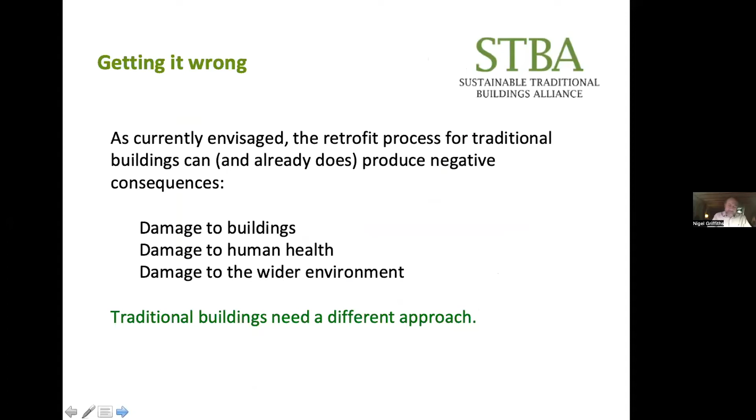Before getting into what we can do to improve our building stock and ways of managing risk, it's very important that we don't compromise that.

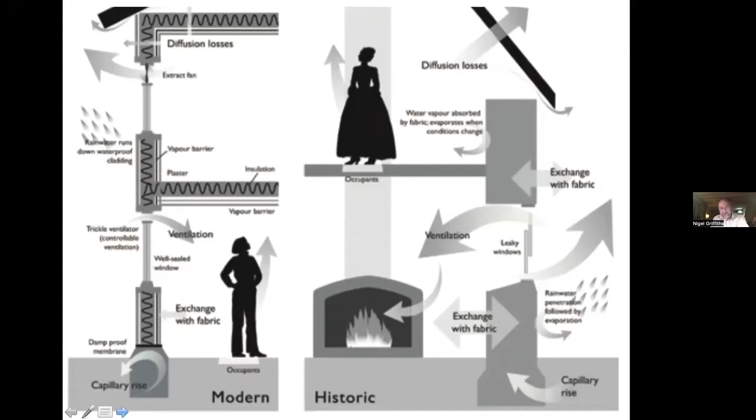And I'll come back to ventilation. If you get this wrong, if you seal up a building and stop it breathing, you get what we call composting building syndrome—and here's a fine example of it, within a couple of years of poorly applied solid wall insulation. Basically, moisture plus heat plus organic material equals compost. That's what we're up against, folks.

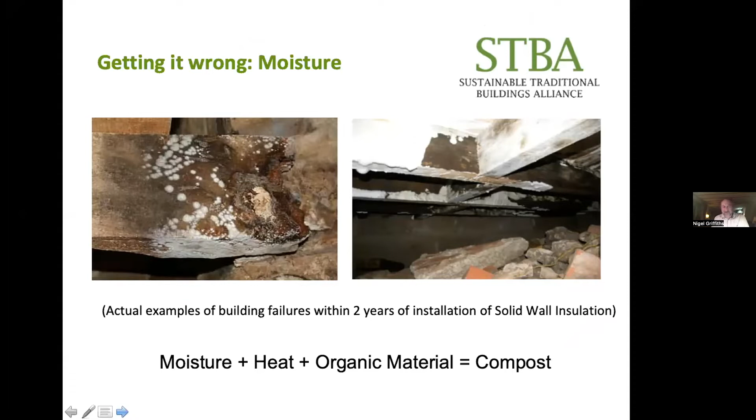Not only that, we've got our friend the dust mite, and if you push moisture levels beyond a certain level, their rate of reproduction increases exponentially. So that and mold growth—we've got a lot to contend with.

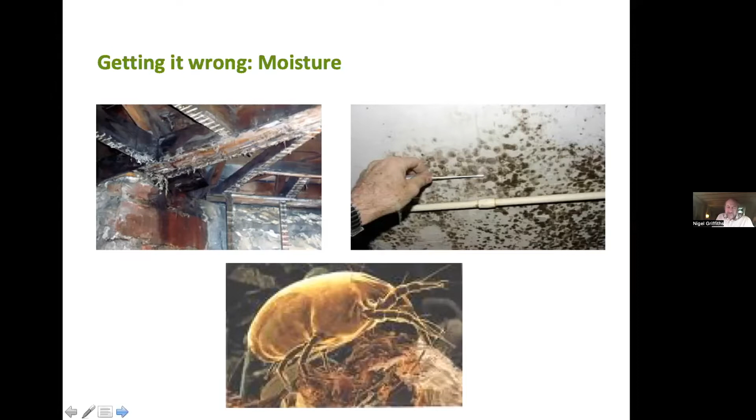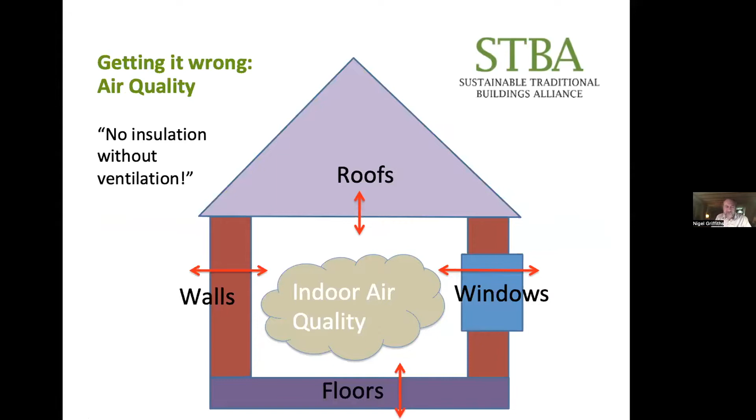There's a very good mnemonic: no insulation without ventilation, based on the American Constitution's no taxation without representation. It's terribly important when we start insulating buildings that we check the ventilation, otherwise we get poor indoor air quality. By sealing up floors, roofs, windows, we compromise this natural ventilation, which is so critical to old buildings.

And there are restrictions in terms of moisture movement. If you make a wall too cold by stopping the heat running into it, i.e. by using internal wall insulation, you reduce the ability of that wall to dry out. In other words, it needs a certain amount of heat running through it from the inside to the out in order to stay dry, because water will penetrate that skin.

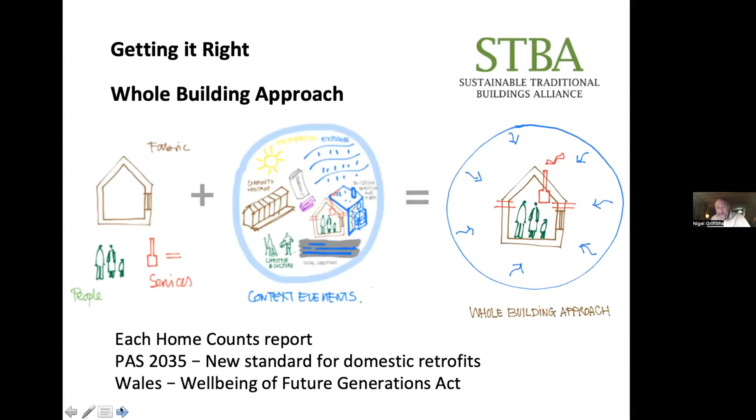In Wales, they're ahead of the game. They've got what they call the Wellbeing of Future Generations Act, which obliges the government to take a much more rounded approach to all new policy. Therefore, they can't just get away with a single measure like carbon dioxide emissions from a building in use - they've got to take a more rounded approach. We need health, heritage, embodied energy in there as well. All these things are important, otherwise you'll end up creating more carbon emissions than you save.

STBA published a paper quite a few years ago, well before the Each Home Counts report, called 'What is Whole House Retrofit?' You can look at it in different ways. There's a very basic approach, just looking at U values of individual building elements - improving the U value of a wall or roof. But that doesn't address questions about air tightness or thermal bridging between a wall and a floor. If you insulate the wall but not the floor, you can get a cold spot, or vice versa, and thanks to thermal bridging you may start to get condensation, damp and mold appearing where you didn't have it before.

The next one up is Whole House Plus, where you integrate all the services, ventilation, and behaviour - but that only gets us so far. Really, where I want to get people to, and I'll come back to it at the end of this presentation, is what we call Whole House Advanced, where we add in the community context as well. So, free download that paper from the STBA website.

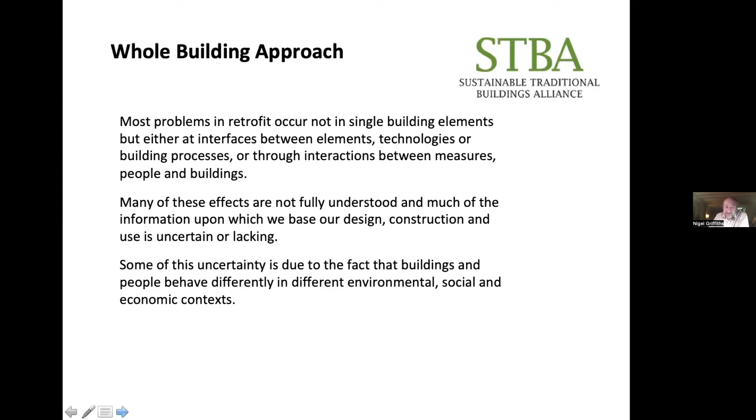So where are we actually going in terms of risk? Most problems in retrofit occur not in individual building elements - wall, floor, roof - but at the interfaces between these elements or between elements and different technologies. A lot of these effects are not fully understood. We don't really understand how a lot of buildings behave, let alone how they behave when we start making changes to them. And it's going to be different depending on how you occupy the building, and even economic context can change it as well.

A very good example of this: when you make one part of the building warmer, you make another part relatively cooler. If you insulate the back wall of a property but leave the front, perhaps for heritage reasons, and don't do anything with the moisture movement through that house, you've actually made it more likely for condensation to occur on the inside of the front elevation. So you've done something to the back, but you've got suddenly a problem at the front that you didn't have before. These are the kinds of issues that we're up against.

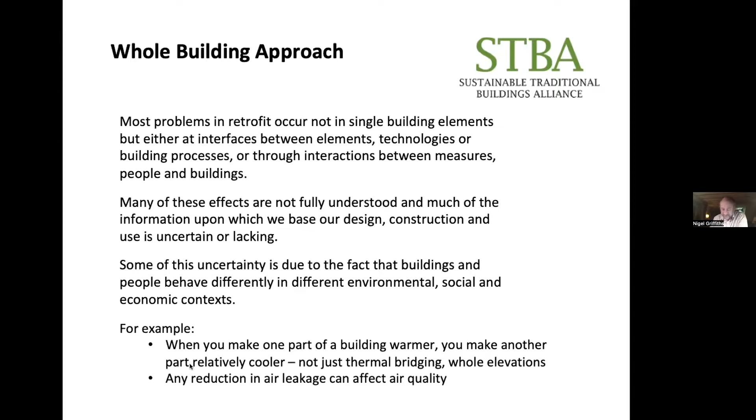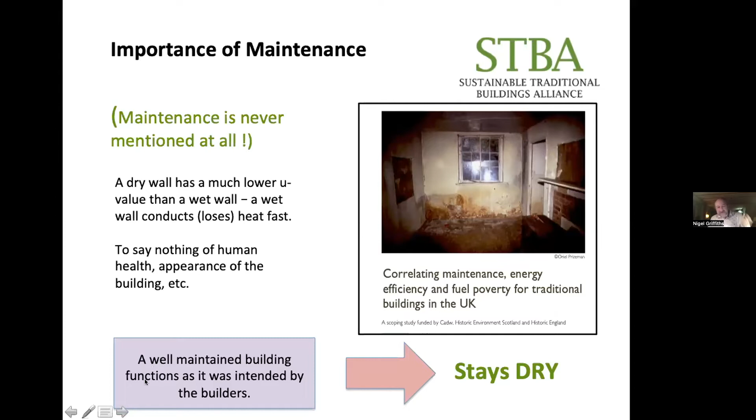Maintenance is never mentioned at all in the whole retrofit debate, but as we all know, a dry wall is much more efficient thermally than a wet wall. A wet wall just conducts heat fast - water is very good at transferring energy out of the building, to say nothing of health, etc. We must maintain buildings in the way they were originally designed to function. That I think is a critical message, but it's kind of not sexy - it doesn't mean spending loads of money and putting in lots of new whizzy technology. No, just fix the building.

So, what can we start to do? By the way, this is what I guess you'd call a building with air tightness challenges currently - one in Yorkshire, I believe. We can look at these different aspects of fabric, and then we can look at these different aspects of services, including ventilation, of course, and we also need to look at the interaction with the occupants.

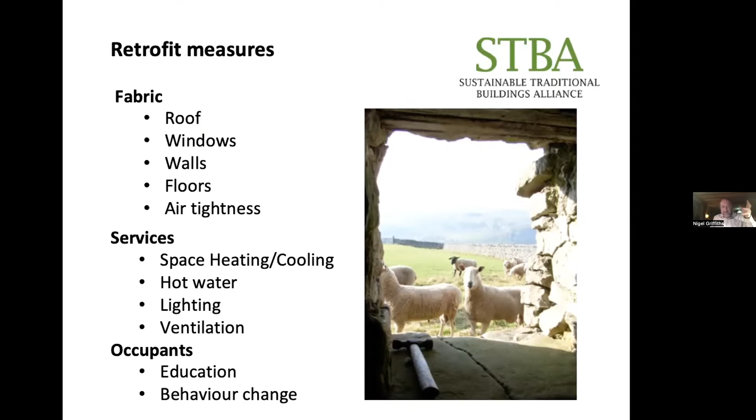There isn't enough time tonight to go through measures for every single one of these, so I'm just going to give you one or two examples.

Looking at a roof, we know that we can insulate lofts reasonably effectively, but it is absolutely critical to maintain ventilation at the eaves. We have found in a number of properties, if you don't maintain that ventilation, you start to get condensation forming on the undersides of rafters, and then you get composting building syndrome. So it's absolutely critical when insulating a loft to use some form of eaves ventilator.

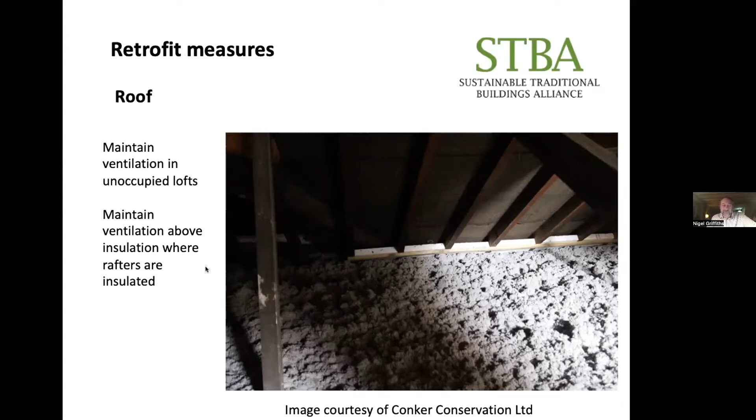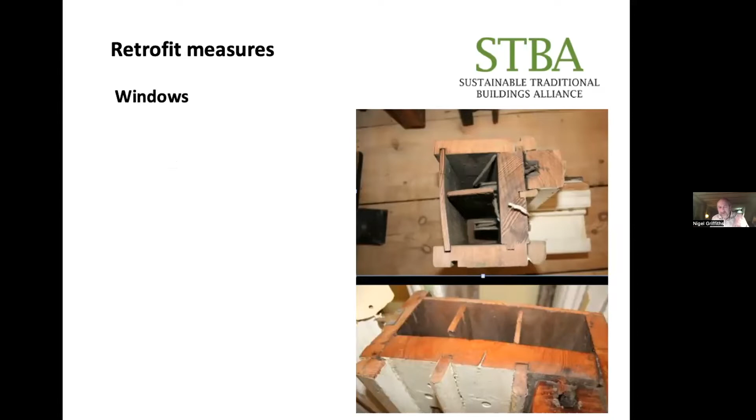Windows. That is a lovely section through a sash window. This is slow-grown Baltic pine, absolutely beautiful stuff. It smells, when you cut it, the way it would have done when the tree was first cut. Those windows originally had rolled glass rather than float glass, which has wonderful imperfections that give a building character. They had the correct proportions, were easily repairable, and a lot of craftsmanship went into them.

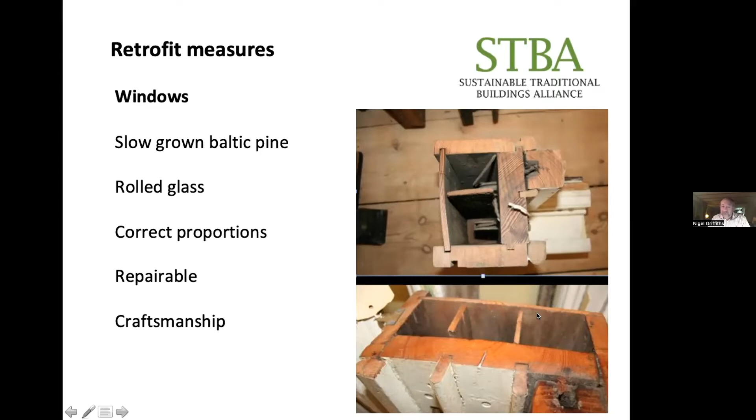There is, I think, a great loss that as a society we've experienced thanks to indiscriminate replacement of really very good functioning sash windows. There were plenty of things we could have done to improve those windows instead. We've put together at the STBA a number of decision trees for different types of fabric intervention, so this is just one example.

This is for windows. Do you already have double glazing? If you do, is it good double glazing? Has it got a decent air gap? Or is it really very early double glazing, which actually still conducts heat quite quickly? You can go through this decision tree.

I'm not going to go through it in detail right now, but you can come to some solutions, which might just be to repair, or to repair and add secondary glazing. They might be to do those two things and add draft proofing, or reinstate your shutters if you've got them, or just heavy curtains if you haven't, because heavy curtains and good draft proofing, plus secondary glazing, will do most of the work of window replacement in thermal terms.

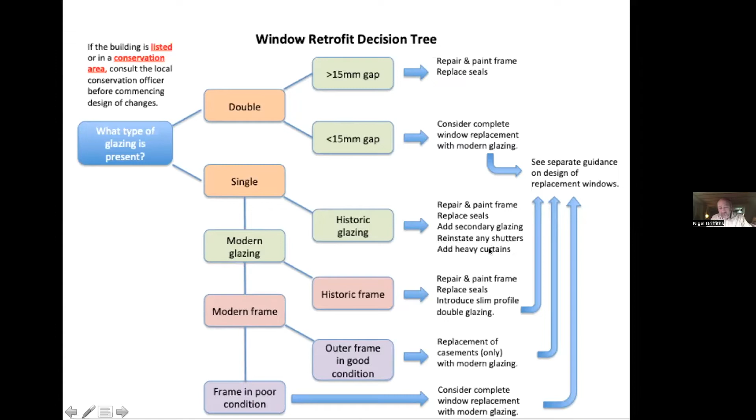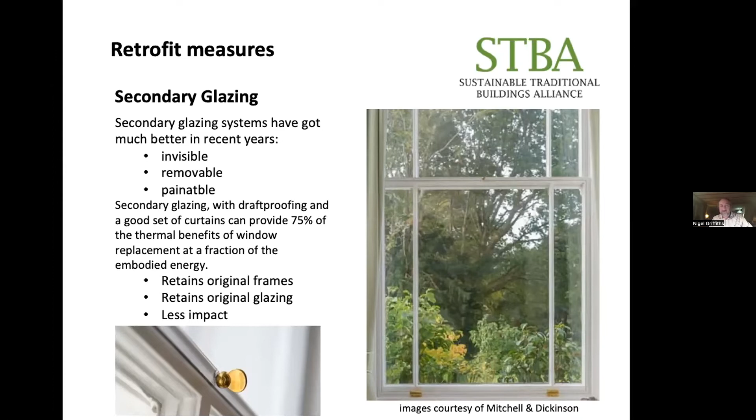So that's certainly something you might have written off as an approach 10 years ago, but we're getting very good at this now. The same with ground floors.

Is it solid? Is it suspended? If it's suspended, you can, I don't know, insert a small child from underneath and ask them to do the work for you. If you haven't got a willing child, you may have to take up the floor and insulate it from above. If you're lucky enough to have a cellar below with good access, absolutely fantastic. But a crawl space is normally all you're going to get.

So there are a lot of challenges with floor insulation, and with solid ones, I'm afraid a lot of the time the solution is just to leave it where it is. Given the embodied energy of ripping up a floor, the solution may very well be to put down a carpet with a good underlay, or solid flooring with a decent thermal underlay. That, in overall embodied energy terms, is probably your best bet with solid floors. Digging them out is a major issue.

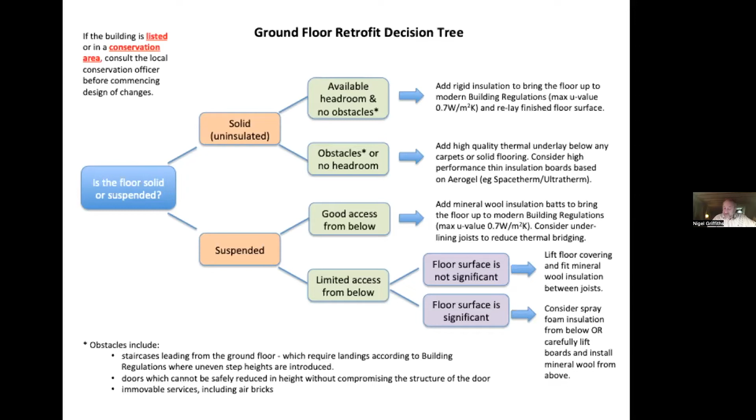What about walls? This is a terrace in my hometown in Harborne, in Birmingham. They insulate the external walls of that terrace over my dead body. I love it. It's got a rhythm, it's got a real beauty to it in many ways. So there are many things you can do, and it depends very much on what you've got.

That top picture, well, those walls have already been rendered. By taking off that render and putting on an insulated render, you're not substantially going to change the appearance of those buildings. The insulation might be a little bit thicker, but worst case scenario, you might have to extend the eaves a little. It is doable here, you've got a tiny gap above the windows. Sometimes you haven't. So on the top picture, I'd say, yeah, okay, maybe go ahead and do that.

The bottom right, obviously not. The one on the left of your picture, well, that's more difficult - that's a Scottish tenement, as I recall. There are certainly some government-funded, or government-backed, projects around at the moment to insulate such buildings externally.

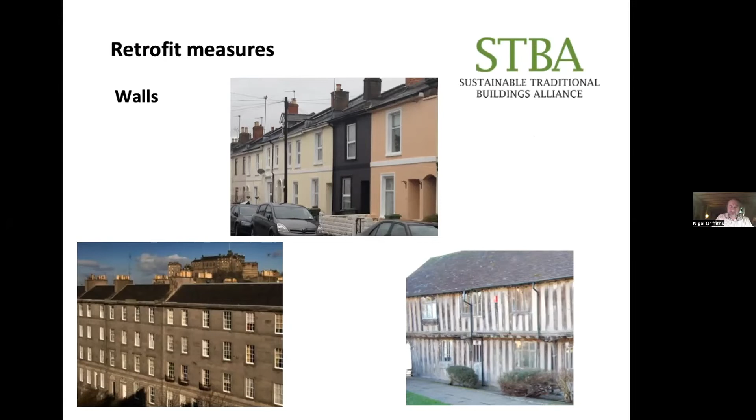But it doesn't have quite the delicacy of some other buildings. It's a nuanced thing, it's difficult. Take a building that's already been rendered, the render's been removed, there's a lot of damage to those bricks, you can't really see far off.

But they're using a breathable system here - a wood fibre board which has been attached to that building on the outside. It'll then be rendered afterwards. The great thing about wood fibre is that it's vapour open, and the render applied afterwards will be a lime render. It's a lime built building, so that will also remain vapour open, i.e. any build-up of water inside the property or inside the wall matrix is allowed to escape both inside and out. Walls breathe, I should say, in both directions.

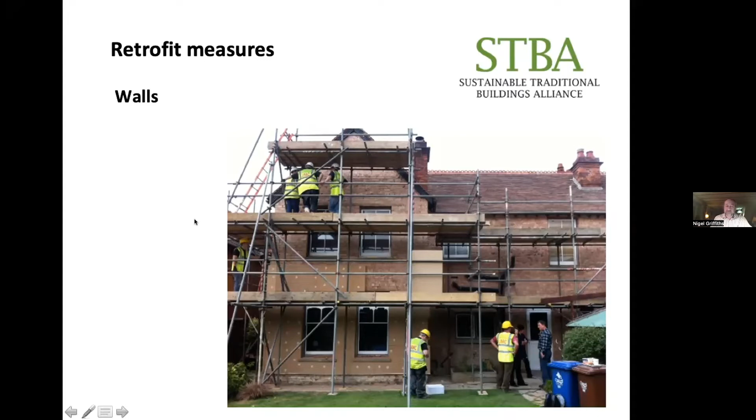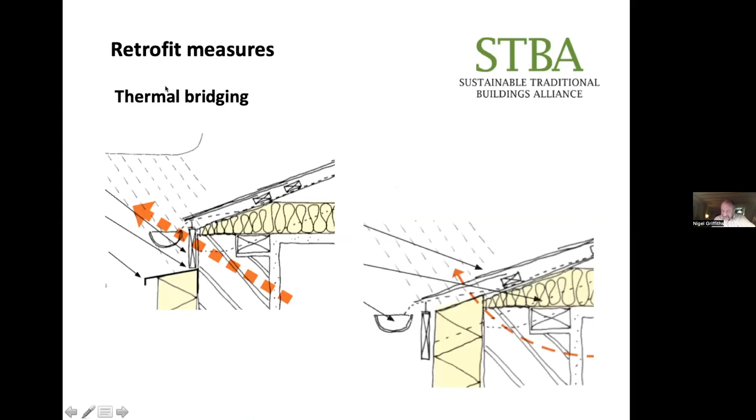A word about thermal bridging, which I think is an important consideration. It most commonly occurs at the junction between a flat ceiling and a wall if it's been insulated externally. It's a difficult detail to get right, and this is why it's so essential to extend the eaves - you can actually produce a junction between these two types of insulation. If you don't do that, you tend to get condensation forming at that top part of the wall, and people often ask why. Nothing else seems to have changed internally, but of course you've got a cold spot there, and the moisture that used to perhaps condense elsewhere has got nowhere to go. So thermal bridging, that's what it is.

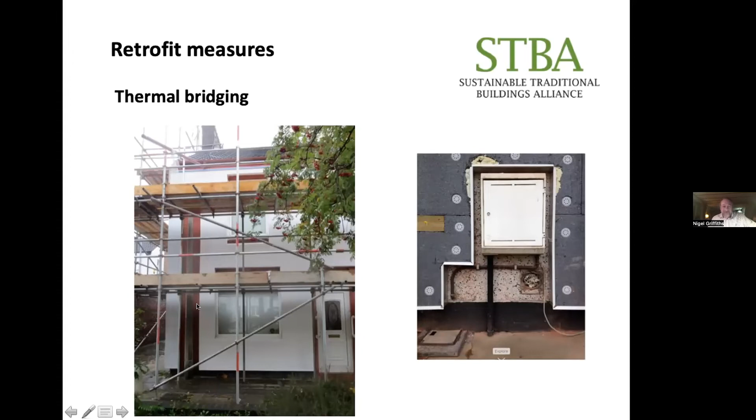Some more horror show, how not to do it. This is in Wales, as I recall, on some social housing. Really, they need to do something else with the gas box, not try to work around there, because they've just created a huge thermal bridge. And in the other picture, you've got a lamppost, and they had to insulate around the lamppost. You get these kind of crackers things in retrofit all the time - it's really about bad planning and a lack of architectural design, and we do need the architects involved.

Internal wall insulation, yes, you can do it. There's going to be a loss to floor space. You've got to use moisture open materials, and a great deal of care is needed at the reveals, i.e. junctions between walls and windows and doors. You may need to use a super thin insulation, something like an aerogel product, to get around the problem of the reveal - otherwise you get condensation at the reveal. It's the one time to use a really, really high performance, super expensive insulation.

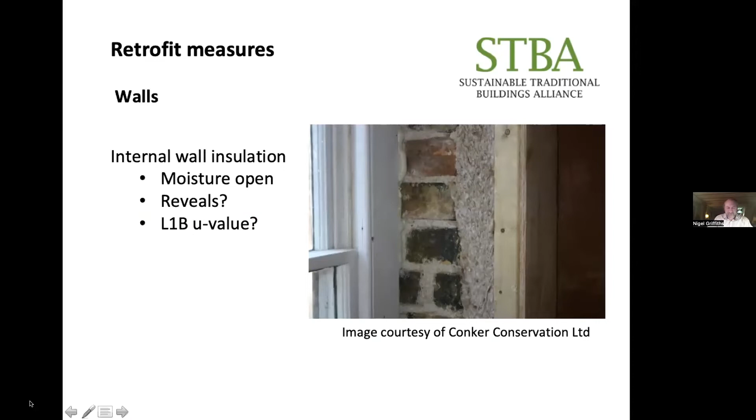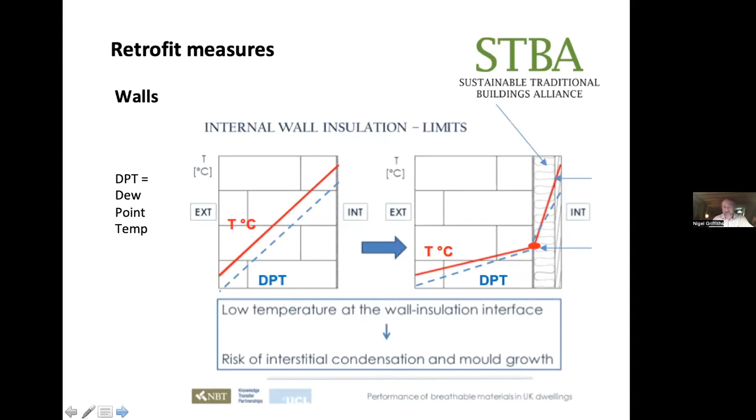There are also limits to how far you can go with internal wall insulation because of what we call the dew point temperature - sorry to get techie on you. But if you get this wrong, if you put too much insulation on the inside of a wall, you can cause condensation to happen within the wall matrix, usually at the junction between the insulation and the wall. The place where you didn't get a problem before suddenly gets wet, and invisibly, because it's behind the insulation, you get mold growth, and that ultimately can harm human health. So come back to what I said at the start about retrofit needing to have that human component.

Just for once, and this is quite unusual to hear a builder say this, the building regulations are our friend at the moment. L1B, the domestic existing part of the thermal regulations, has what's commonly called an exemption, but it's really a special considerations clause - 3.8 to 3.10. It's a free download from government websites. It mentions various categories of building where these special considerations apply, including buildings of traditional construction. So that's all the old buildings you have in national parks, be they stone, be they brick, in fact be they timber frame, but I think largely stone.

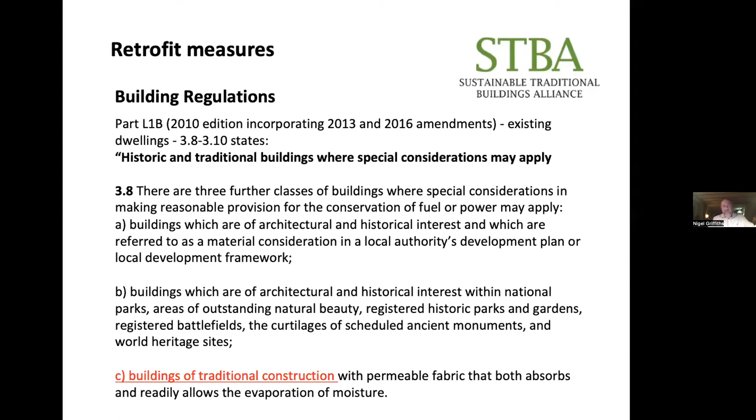So they're built with lime mortar, a permeable fabric that readily allows the evaporation of moisture. In those buildings, they have this exemption that when undertaking work, the aim should be to improve energy efficiency as far as is reasonably practical. This is very important because it gives you some ammunition if dealing with the building inspector - you can say, no, actually, we don't need to meet the minimum U values set out in the other parts of Part L of the building regulations, because it's a building of traditional construction, permeable fabric, vapor open. We just need to do what is practicable, what is safe.

However, there is a proposal afoot, and there was a consultation last year to change Part L, so the only exemption will be in terms of moisture risk - we lose the exemption for traditional buildings in terms of their character, the character of the host building. That is a very important change and proposed change, and we need to get onto it and make sure it doesn't get too much traction. Whether it was deliberate or not, I don't know, but it's a bit of a charter for the insulation companies to get out of that very important exemption for traditional buildings that's been there for a long time, since 2010.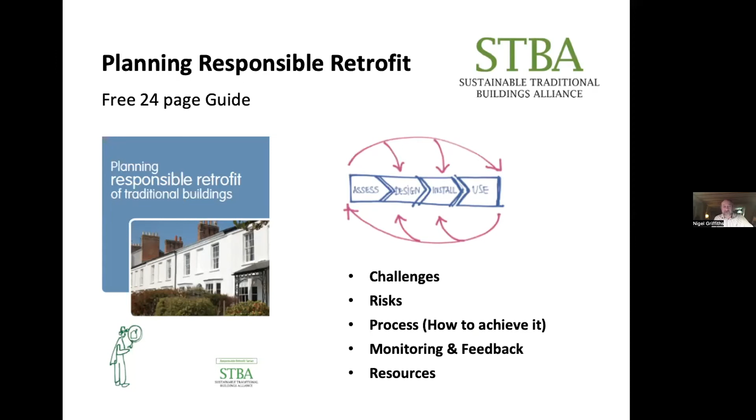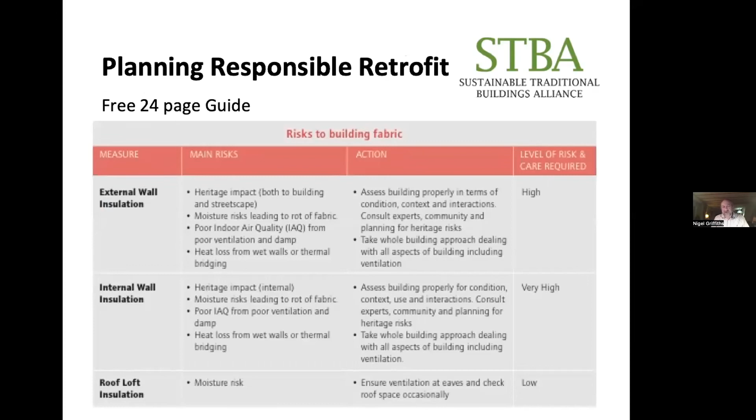The STBA does try to collect and share that information. So, for example, in that guide, it tells you what the risks of EWI, IWI, roof and loft insulation are, and tells you how to manage those risks. That's the kind of information you'll find in that guide.

I mentioned there had been a new standard for retrofit, which came out in 2019, and this really marks a sea change in how we approach retrofit in this country. Because among its aims, it starts with functionality, usability, and durability. It mentions comfort, health, and well-being - this is really revolutionary stuff for a standard that's got to do with energy efficiency. And amazingly, it also talks about the enhancement of architectural and cultural heritage as represented by the building stock.

So to get these things actually thought about when planning retrofit is a major success. Now, all publicly funded projects have to use this new standard, but it's of course voluntary for other schemes to use. I would really suggest that whatever strategies you develop for the national parks are based on the principles, the aims, of PAS 2035. It really is a useful document.

It's very heavy on process. The idea is to avoid the one-size-fits-all approach. It absolutely relies on survey - every building is different, and means we've got to treat every building with respect and develop an individual plan for each one. We can't just say that what works in one place will work in another. Even location can change how you decide to approach a retrofit plan.

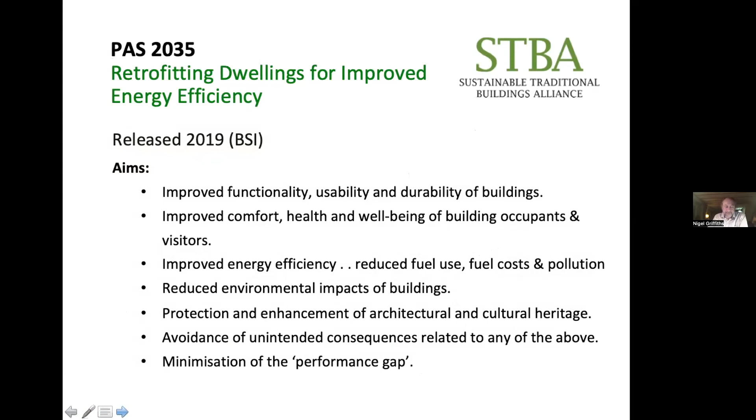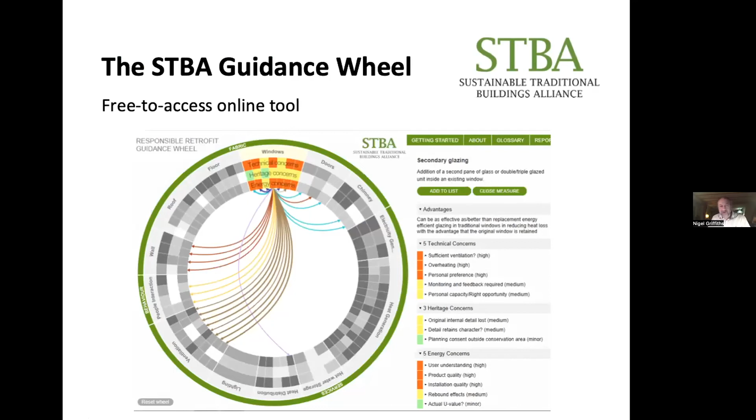The guidance wheel itself is a freely available online tool. If you simply Google STBA guidance wheel, it will take you to a website called Responsible Retrofit, where you should be able to access it. If we had a little more time, I would actually demonstrate it for you online, so I'm going to whiz through the slides which are here, but it's an aid to decision making.

What it does, having selected the context and a particular measure - in this case we've selected secondary glazing - is provide arrows that link to other aspects of building fabric and services you need to think about. Each of those arrows has an explanation attaching to it. There are technical concerns, and all the things you see on the right-hand side of the screen open up with those arrows, dropping down into menus which give you a great deal of information about what those particular concerns are, whether they're heritage, energy, or technical concerns.

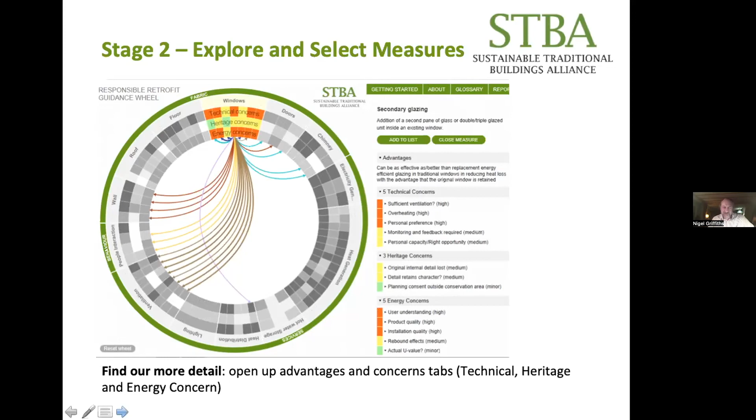And all of this is backed by published peer-reviewed research, which is itself accessible through this tool.

So, if you've selected external wall insulation, it'll tell you that the technical concerns relate to ventilation, moisture risk, thermal bridging, which we've touched on, and indeed overheating - that can be a problem with some retrofitted buildings. And of course, in terms of heritage, we have a change of appearance, a loss of detail, and ultimately a risk of damage to the fabric. So those are the sorts of things that are flagged up by the guidance wheel.

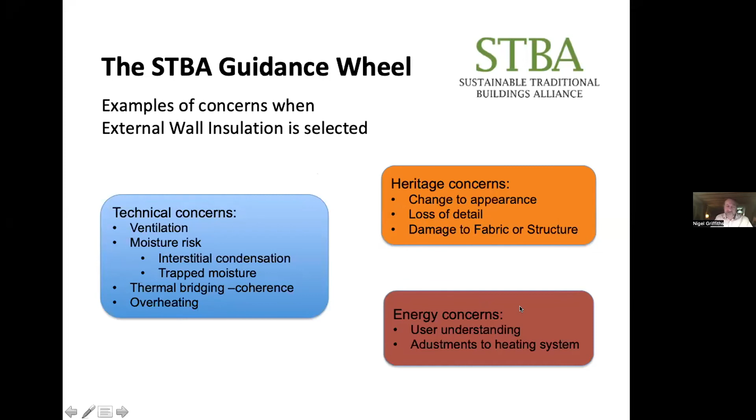I'm whizzing through this because I want to tell you about some guidance from other people. Historic England have put out some great guidance on old buildings, including specific guides to dealing with particular building elements, be it a roof or a floor and so forth. But their overall guides addressing process and the principles of retrofitting old buildings are also very good.

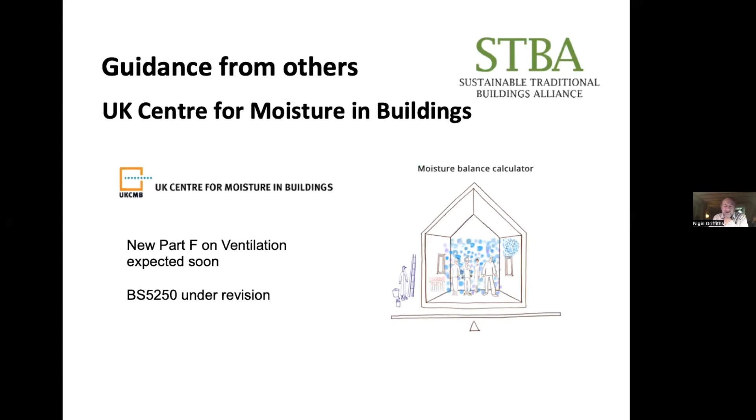I commend Historic England to you for sources of further information. There's also the UK Centre for Moisture in Buildings, which was founded by a late colleague of ours, Neil May, from the STBA. Adrian worked very closely with Neil, and we've kind of handed over the expertise in moisture in buildings to them. So they are now the kind of UK heads of this.

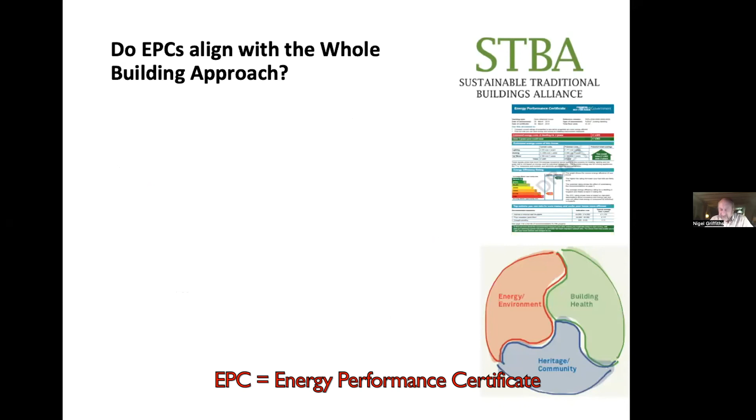I'm sure you've all heard of EPCs. A lot of you have probably got them. I'm afraid I take rather a dim view of EPCs. They simply can't align with the whole house approach. I mean, they can provide a useful part of it, but they can't deliver it. There's nothing on condition, context of any kind really - moisture, ventilation, heritage significance is completely excluded from an EPC. And I call it yesterday's metric for yesterday's agenda, and I stand by that.

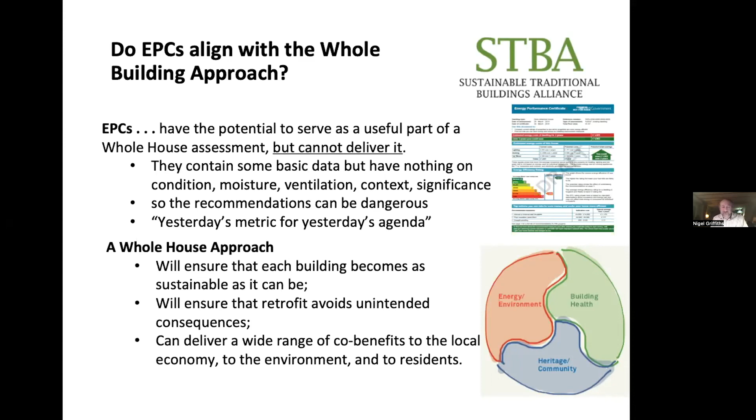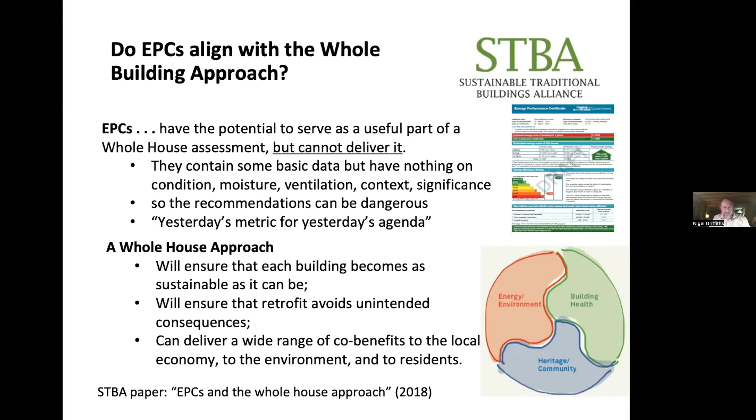So we did quite a detailed paper exploring what could be done about EPCs. That's another download if you want it.

I said right early on, when we were looking at the different levels of whole house retrofit, that there was this whole house advanced level. Now that kind of morphs into what I am now describing as a regeneration agenda. If we're going to spend an awful lot of money and effort changing our building stock to accommodate the needs of the 21st century and address environmental issues, including climate change, but also resource depletion and pollution of different kinds, and keep in mind heritage and health...

We can go further. We can provide local employment. We can not just do a retrofit to a few buildings, but start to regreen the environment. We can clean up the legacy of the industrial revolution, which we never really managed to do in the 20th century. Yes, we'll do energy efficiency, but let's do water efficiency as well, and while we're about it, sustainable drainage and some local facilities. We can get smart with our local energy networks - energy, like everything else, has economies of scale, so it's better done at scale. And we can start to introduce recycling, car sharing, garden sharing.

I'm beginning to sound like an old hippie. Yes, I know, but that's kind of what I am, so bad luck. In the midst of all this, you can get some community-led decision making - that's really where I think this is leading. We need genuine localism to deliver a regeneration agenda.